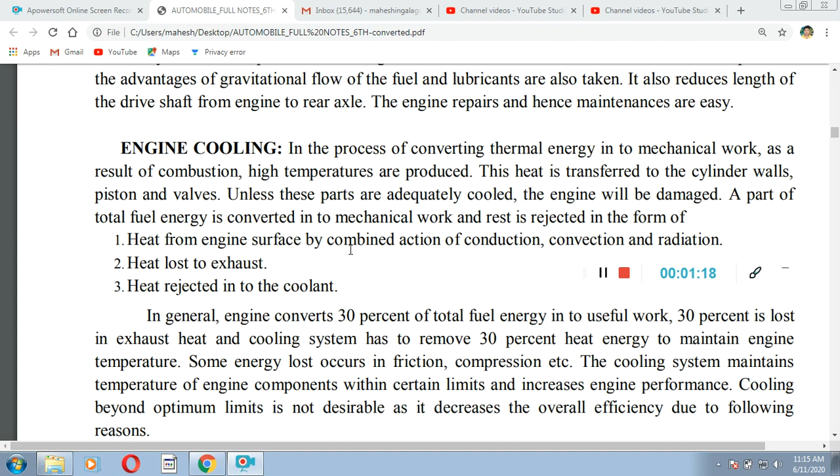Now, cooling is necessary due to the following reasons. What are the reasons which are necessary for cooling the engine? So first reason: as the engine temperature increases, the strength of the material used for the various engine components decreases. As an example, in water cooled engines, the temperature of the cylinder head should not exceed 270 degrees Celsius, and air cooled engines use light alloys, so the temperature should not exceed 200 degrees Celsius. So this is the first reason why cooling is required for the engine.

Now the second reason is the lubricating oil used in the engine also decides the maximum temperature that can be used for the different lubricating oils. This temperature range varies from 160 degrees Celsius to 200 degrees Celsius. If the engine temperature exceeds this limit, the lubricating oil may deteriorate, and its properties will change. Or we can say that evaporation and burnout of the lubricating oil will take place inside the cylinder, and it causes piston and cylinder damage. Overheating results in piston seizing also.

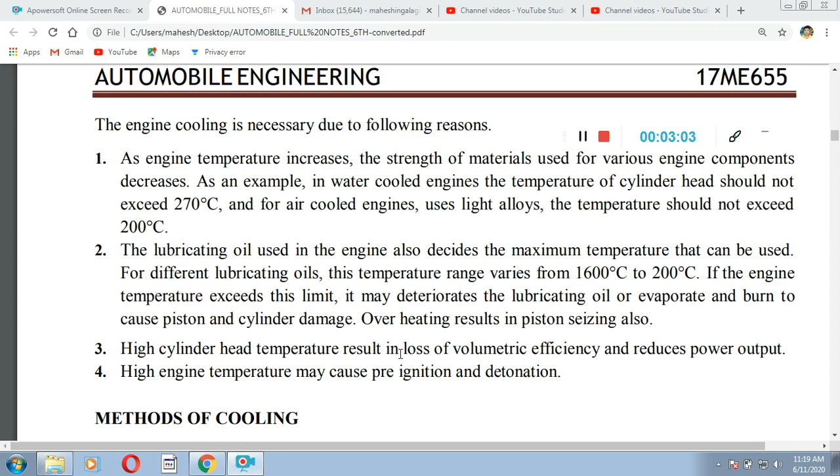The third reason why cooling is required in the IC engine is high cylinder head temperature. If the cylinder head temperature is high, it results in loss of volumetric efficiency, which reduces power output. High engine temperature may also cause pre-ignition and detonation, which is not good for the engine.

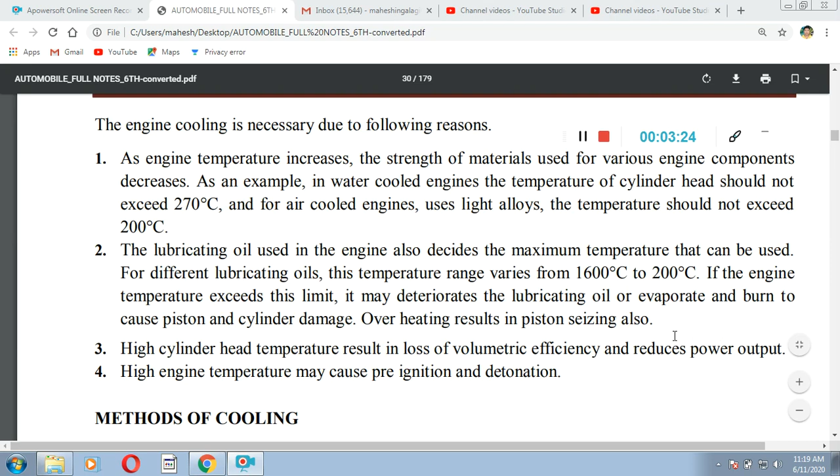Now the methods of cooling. We have two types here: the first one is air cooling and the second is water cooling. In air cooling, the air stream flows continuously over the heated metal surface, and the rate of heat dissipation depends on the surface area of the metal, air mass flow rate, thermal conductivity of the metal, and temperature difference between the metal and the air. These are the parameters which affect the heat transfer rate.

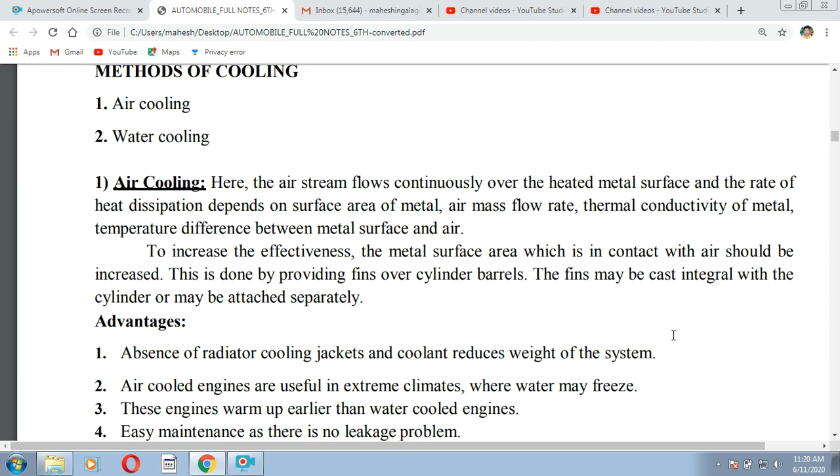To increase the effectiveness, the metal surface area which is in contact with the air should be increased. This is done by providing fins over the cylinder barrel. The fins may be cast integral with the cylinder or may be attached separately. So likewise there is the air cooling method.

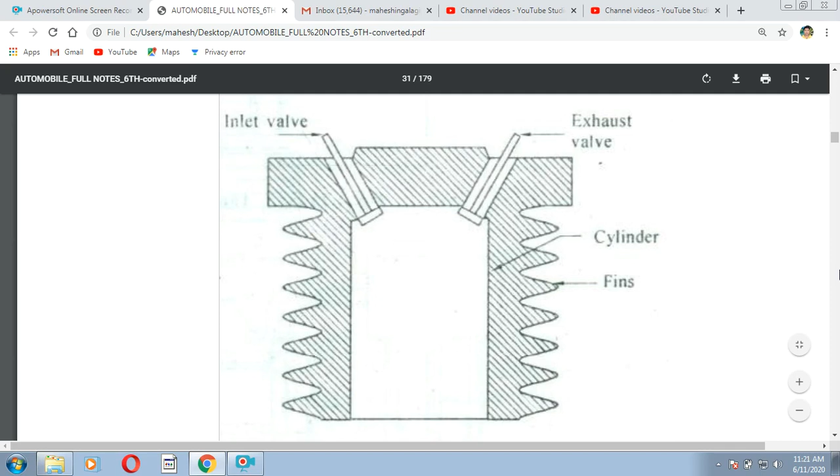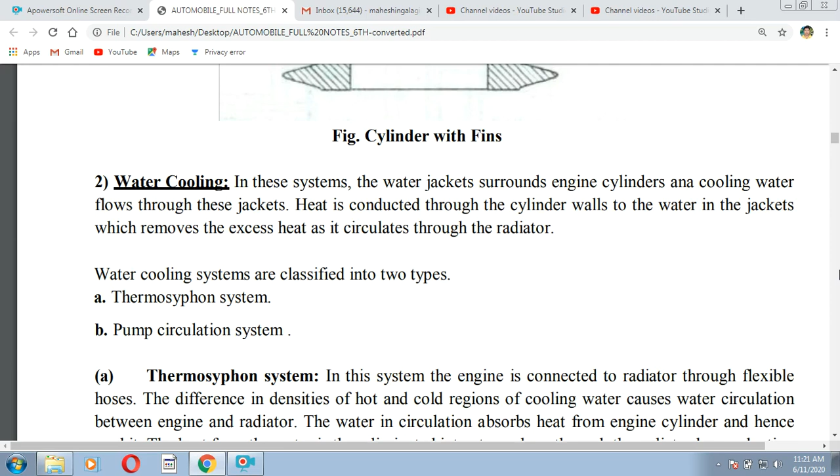So now water cooling. In these systems, the water jacket surrounds the engine. There is a water jacket installed around the engine cylinder, and cooling water flows through these jackets. Heat is conducted through the cylinder wall to the water in the jacket, which removes the excess heat as it circulates through the radiator. Cooling systems are classified into two types, that is the thermosyphon system and the pump circulation system.

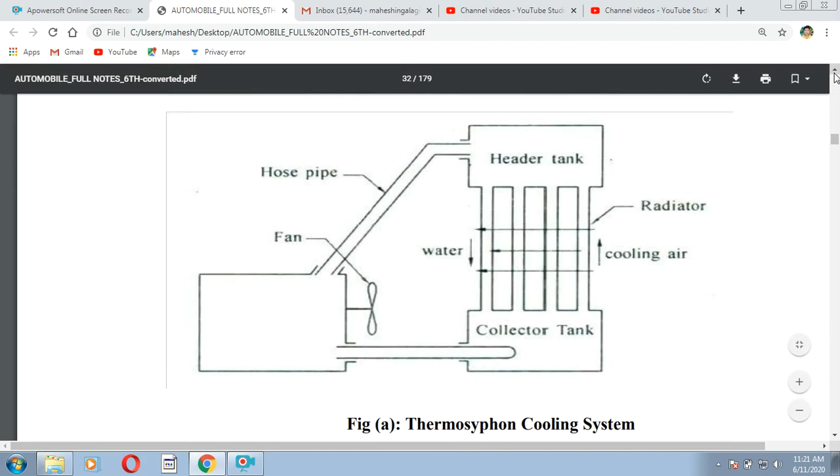So, the thermosyphon system. This is the diagram for the thermosyphon system. Here we have the very important parts, that is the header tank, collector tank, and the very important part, the radiator, along with cooling air, hose pipe, and fan.

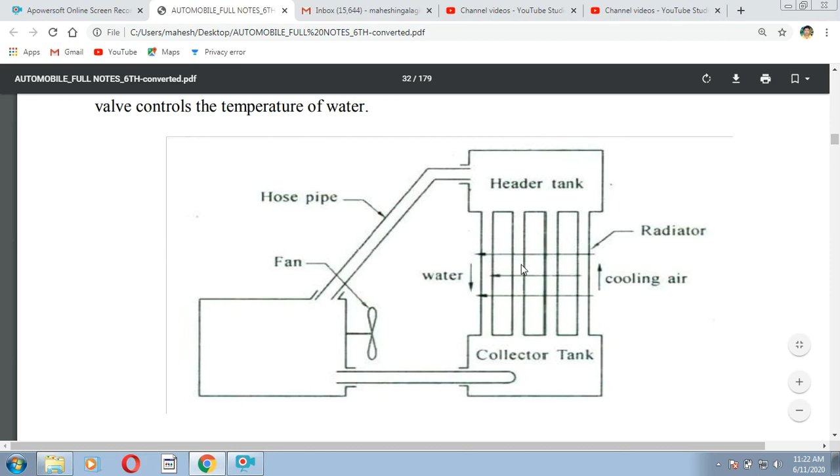The hot water enters here in the radiator, cooling air flows through it, and the hot water rejects its heat, so it gets cooled and is collected in the collector tank. Once again that water circulates around the water jacket of the cylinder and is returned back to the header tank.

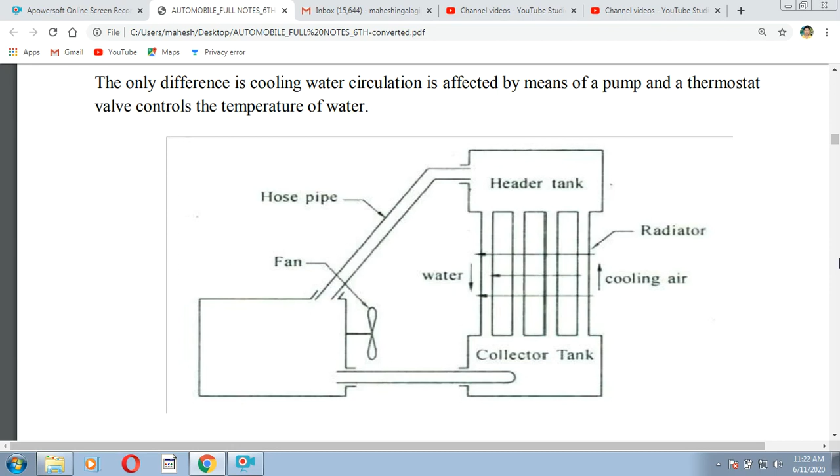So likewise, the cooling process of water will take place, and it will reduce heat from the engine. So this is the thermosiphon type of cooling system.

And now one more system we have here, the pump circulation system. The working principle of the pump circulation system is the same as the previous thermosiphon type of cooling system. Here the thing is that the pump is used for the circulation of water.

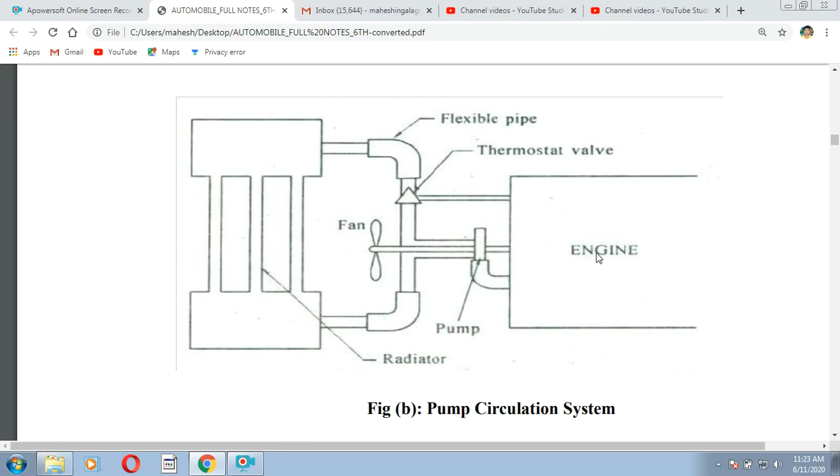In the previous type, the water circulates inside the radiator naturally, due to temperature difference and density difference, but here the pump is used for the circulation of water inside the radiator, so that water gets cooled and flows again towards the engine to receive the heat from the engine, so we can maintain the temperature.

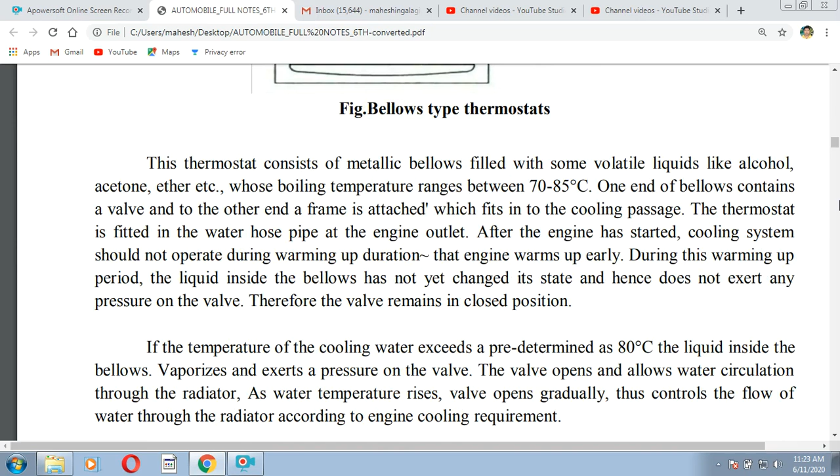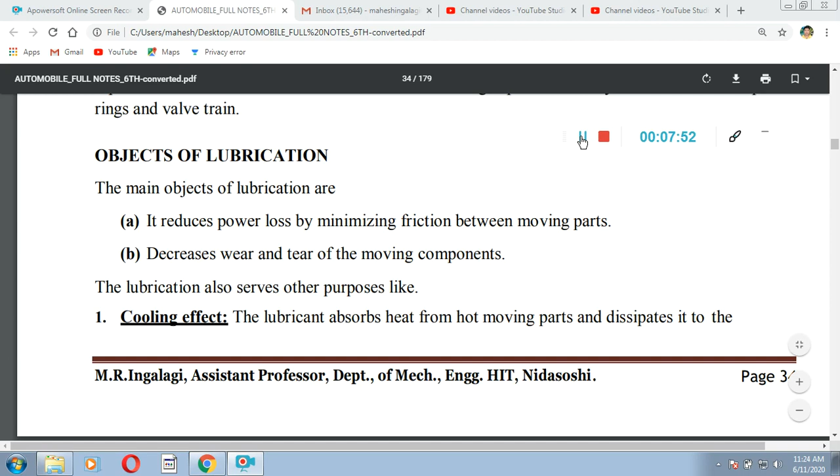So likewise we have two types for the cooling of the engine. Now directly moving towards engine lubrication. Here we have some objectives for lubrication. The first one is to reduce power loss by minimizing friction between moving parts. With the help of lubrication we can reduce the friction between the moving parts and decrease wear and tear of the moving components. These are the two objectives of the lubrication process.

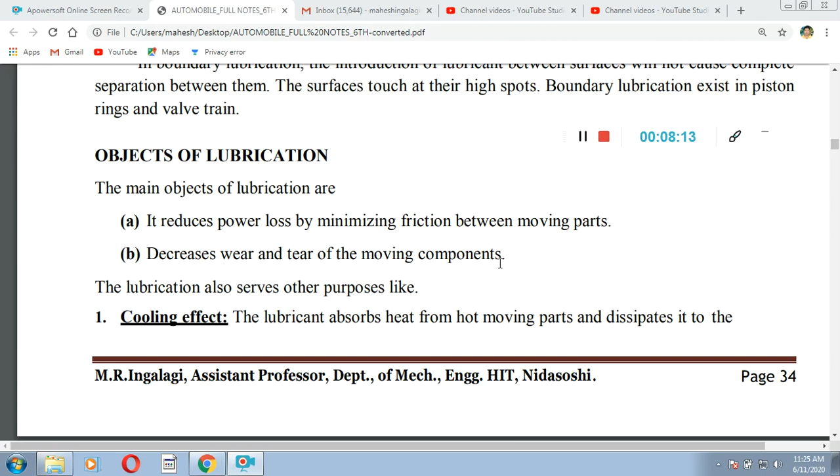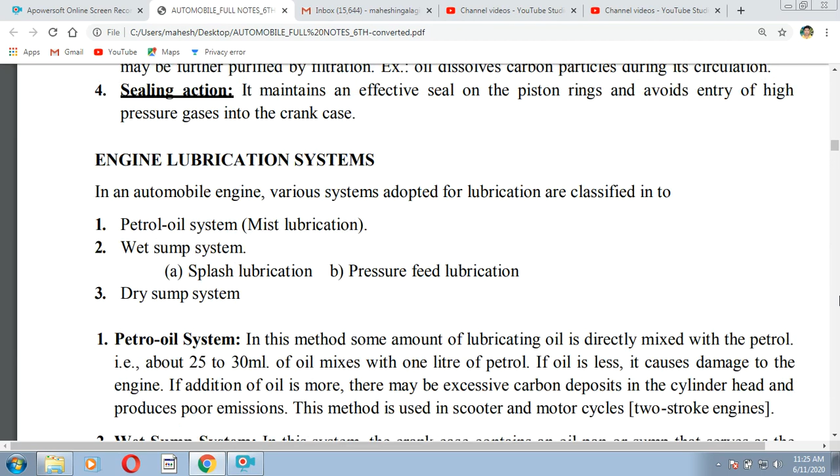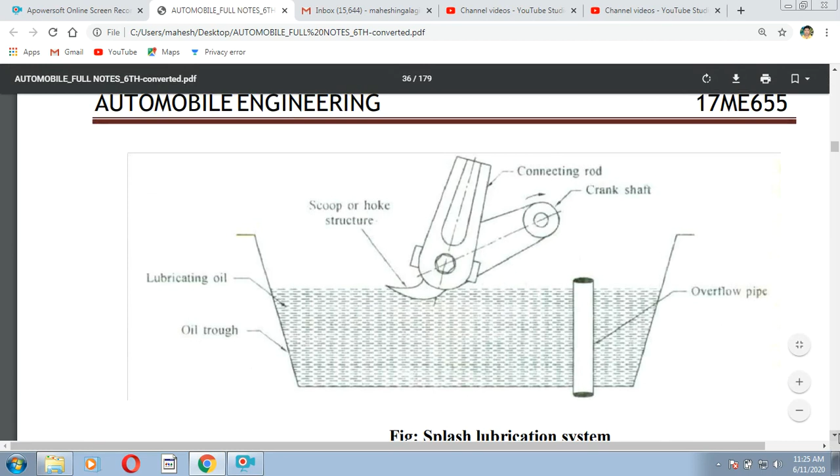So now, main objectives, and the engine lubrication systems. We have different types of systems here. Directly we will move towards the diagram. Here is the splash lubrication system. This is a very important type of lubrication.

It consists of a connecting rod and a crankshaft. These two are connected to each other, and a scoop or hook structure is provided at the bottom, and the lubricating oil, the lubricating oil sump, and an overflow pipe. So here, the connecting rod and crankshaft.

When the crankshaft rotates, the connecting rod reciprocates, and the scoop provided here receives oil from the oil sump and sprays or supplies that oil towards the engine cylinder, so that lubrication takes place. So this is how the lubrication process takes place in the splash lubrication system.

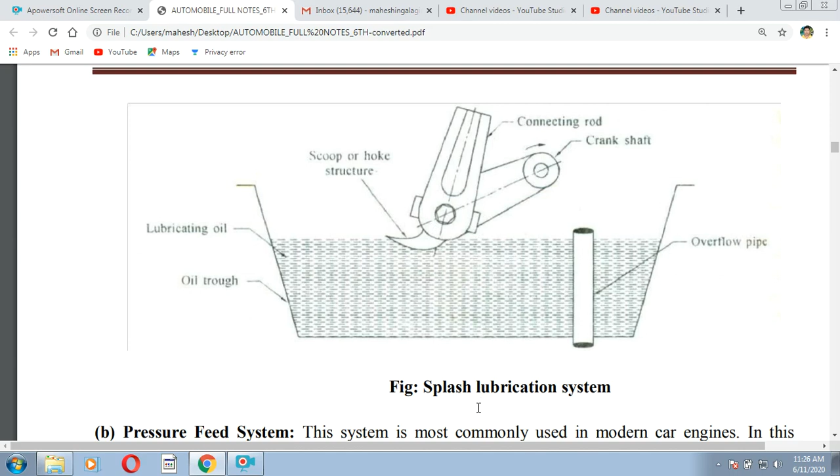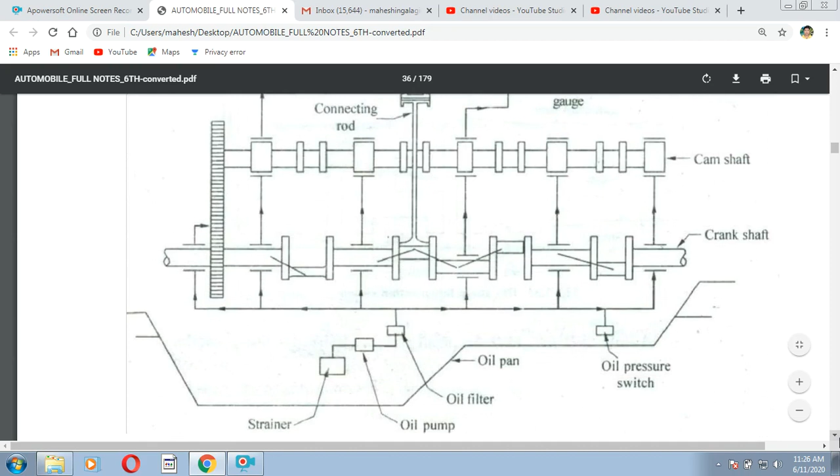And now moving towards the pressure feed lubrication system. Here we have one more diagram for the pressure lubrication system, that is, the full pressure feed lubrication system. This diagram here is the full pressure feed lubrication system.

It consists of, very importantly, the oil sump. Once again, this is the oil sump, and there is the strainer, the oil pump, the oil filter, the oil pan or oil sump, the oil pressure switch, and these are the different parts of the IC engine. You already know these: crankshaft, camshaft, rocker shaft.

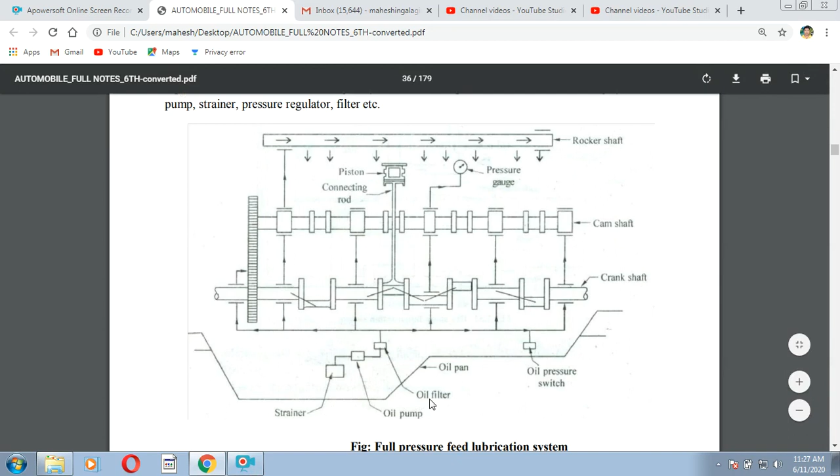So here, with the help of the pump, oil is sucked from the oil sump or oil pan through the strainer and the filter, so that impurities can be removed from the oil, and it is pressurized through these pipelines, so that the oil enters the crankshaft.

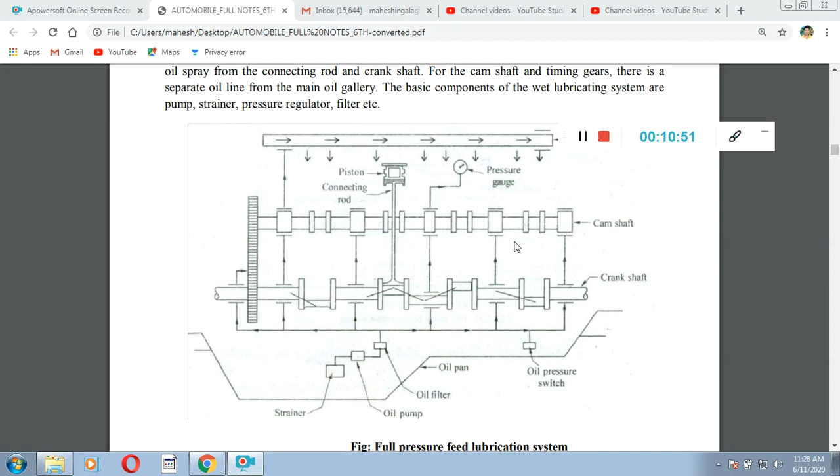Now that oil is pressurized through these pipelines towards the crankshaft, camshaft and various parts of the engine. So this is the full pressure feed lubrication system. And now the dry sump lubrication system. Here we have the dry sump lubrication system.

This is the diagram, and it consists of a pressure relief valve and vent. And we have the dry sump, the strainer, the filter, the filter bypass pressure relief valve, and the vent and supply tank. Here we have two oil pumps.

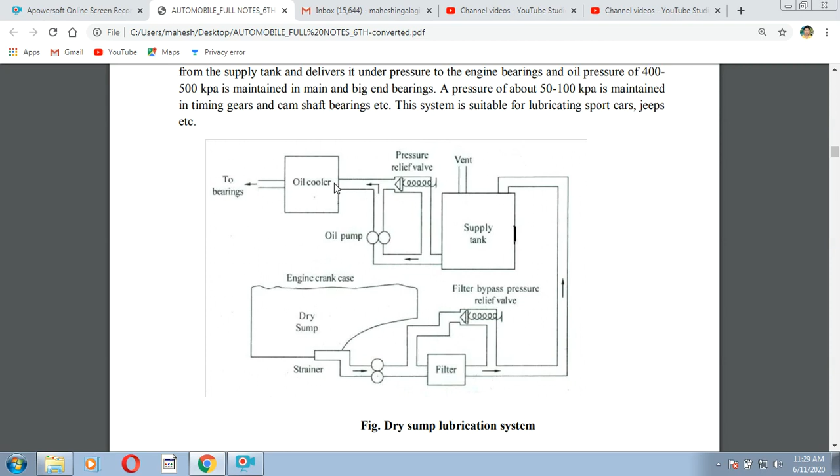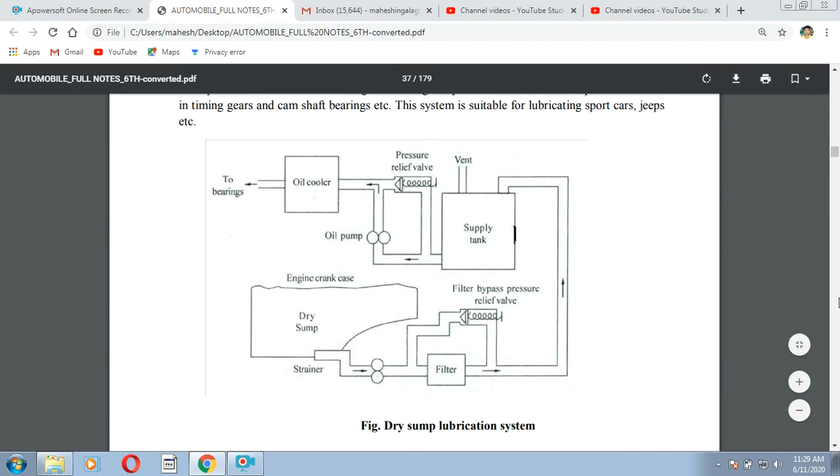The first oil pump is used to draw oil from the dry sump, so that oil passes through the filter and enters the supply tank, and then it flows towards the engine with the help of one more oil pump. The oil moves towards the oil cooler, where the hot oil temperature is reduced, and that oil enters the bearings. So likewise the dry sump lubrication system works.

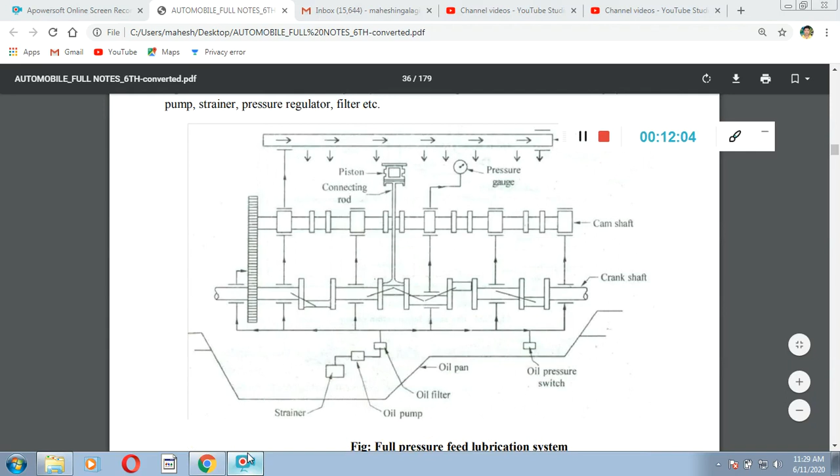So this is all about the lubrication system and cooling systems of the engine. In the next video we will discuss the fourth module.